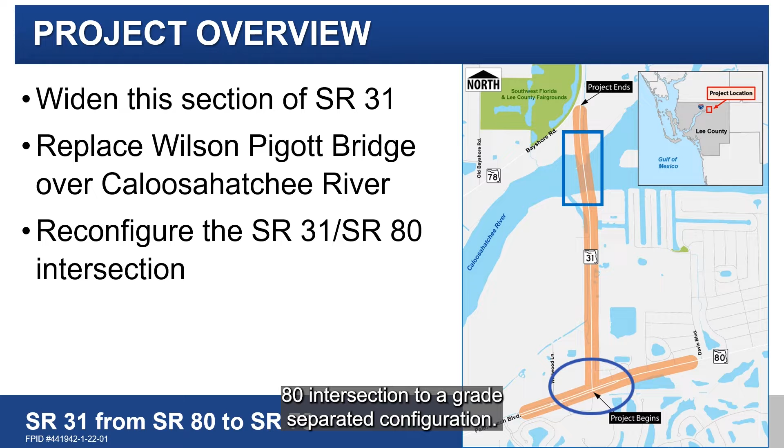The department proposes to widen this section of State Road 31, replace the Wilson Pigott Bridge over the Caloosahatchee River, and convert the existing State Road 31/State Road 80 intersection to a grade-separated configuration. The need for the proposed improvements to State Road 31 is based on existing and projected conditions, including the tremendous growth projected for Lee County.

Due to its proximity to Interstate 75 and other destinations, the area is transitioning from agricultural and rural uses to suburban, including Babcock Ranch. Current average traffic volumes are predicted to increase to volumes that would exceed the typical maximum volumes for a two-lane roadway by the year 2045. The area continues to experience substantial growth, further increasing traffic and straining the corridor's capacity, resulting in more congestion and poor level of service, including at the State Road 31/State Road 80 intersection.

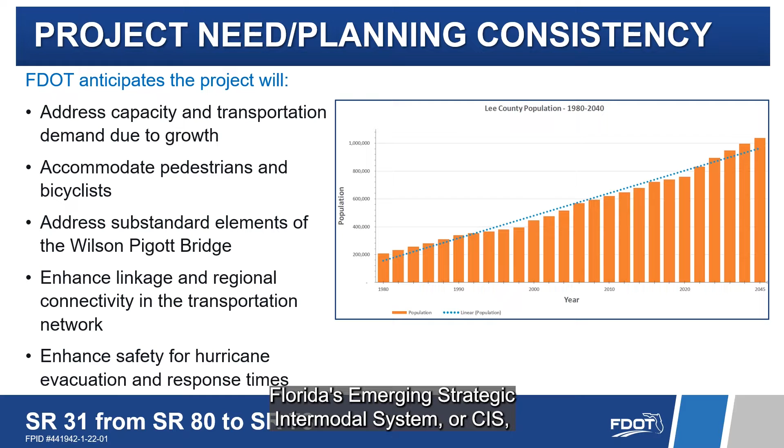In addition to traffic growth, State Road 31 currently does not provide accommodations for pedestrians and bicyclists. Also, improving the capacity of the roadway and maintaining the functionality of the bridge is important due to other special designations and functions. State Road 31 is a designated highway corridor of Florida's Emerging Strategic Intermodal System, or SIS, and a Tier 1 freight corridor of Lee County, with about 25% of existing traffic along the roadway composed of trucks. SIS facilities are those that are critical for regional and statewide movement of people and goods.

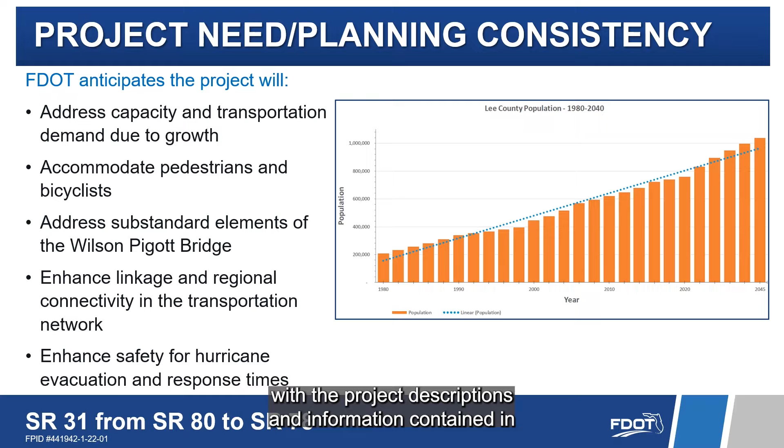The proposed project meets planning consistency. This means PD&E study documents are consistent with the project descriptions and information contained in state, regional, and local planning documents. Within the project limits, State Road 31 is a two-lane roadway with 12-foot lanes and 5-foot paved shoulders. Stormwater runoff is collected in roadside ditches with ultimate discharge to the Caloosahatchee River. The existing typical section does not meet SIS facility standards. The posted speed limit is 40 miles per hour.

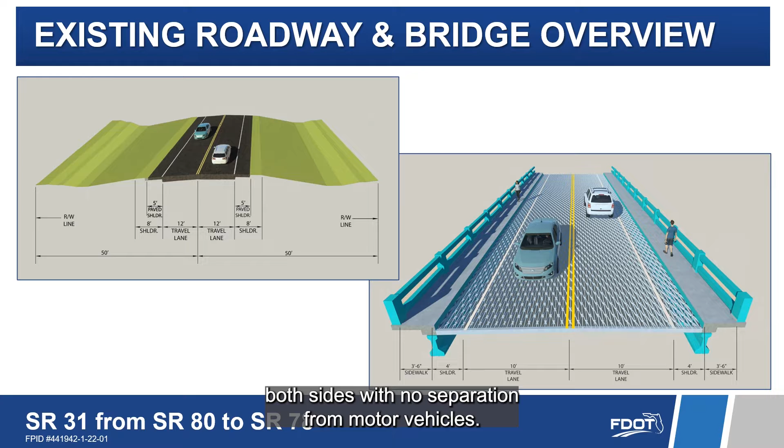The Wilson Pigott Bridge currently has two 10-foot lanes, 4-foot shoulders, and 3.5-foot sidewalks on both sides with no separation from motor vehicles. The existing vertical clearance over the channel is 21 feet.

Throughout this PD&E study process, FDOT evaluated many different concepts to improve capacity and operational conditions within the project study area, including at the State Road 31/State Road 80 intersection, and to identify a viable bridge replacement option. After environmental and engineering analyses and public and agency comments, many of these alternatives were eliminated.

The last public meeting was an alternatives public meeting held on January 30th, 2023. At that meeting, we asked for your input on proposed improvements to State Road 31. Some of the feedback received included concern regarding potential impacts to businesses, noise, and questions about construction duration. Based on your comments and additional environmental and engineering analyses, a preferred alternative was selected for the State Road 31 project. The supporting technical documents available for your review provide more detailed information regarding the engineering and environmental evaluations.

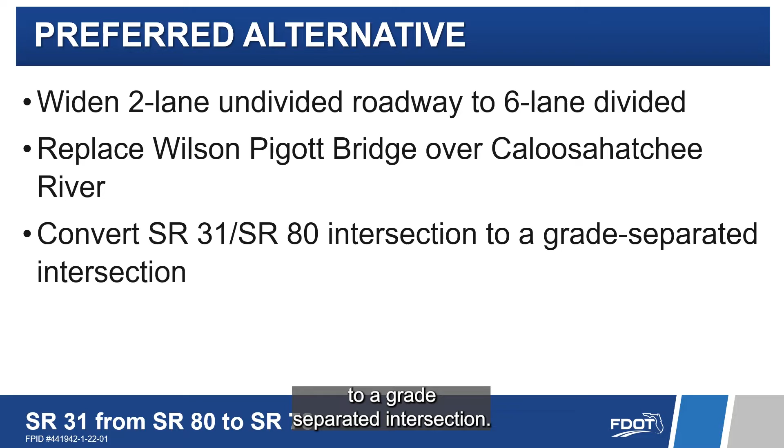The preferred alternative for State Road 31 results in the following: widening the existing two-lane undivided roadway to a 6-lane divided roadway from State Road 80 to State Road 78, replacing the Wilson Pigott Bridge over the Caloosahatchee River, and reconfiguring the existing State Road 31/State Road 80 intersection to a grade-separated intersection. Please note that all materials for the preferred alternative in the following slides are on display here tonight and are available for viewing on the project website.

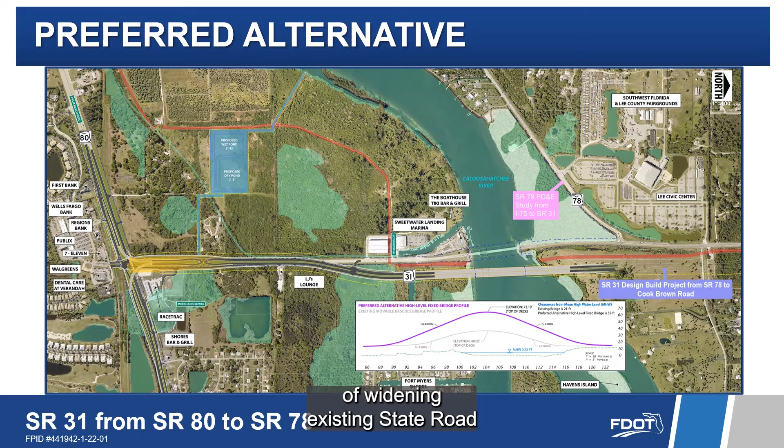The preferred alternative is a combination of widening existing State Road 31 from State Road 80 for about 0.7 miles, then shifting 300 feet east prior to the Wilson Pigott Bridge to minimize impacts to the existing Florida gas transmission line.

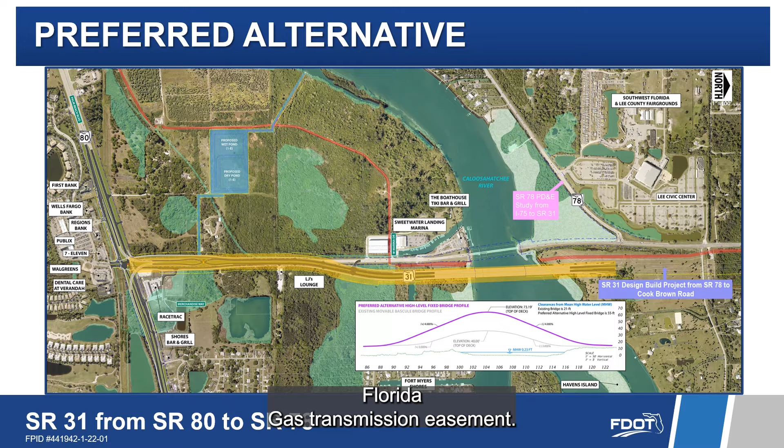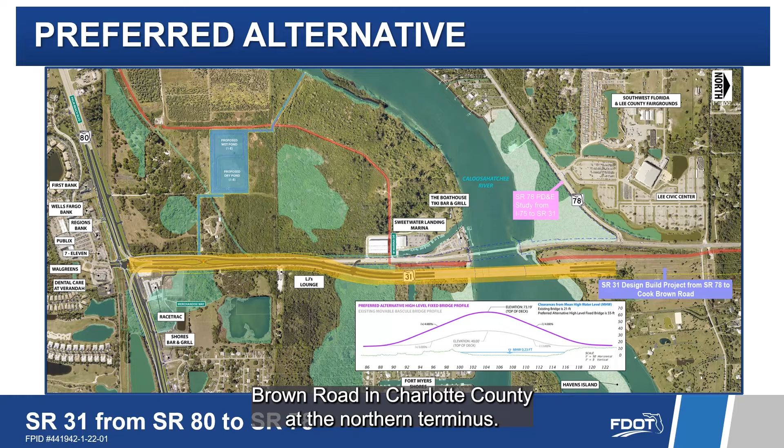This portion of the alignment will be located east of the existing two-lane roadway and the 50-foot Florida gas transmission easement. This project will tie into the current State Road 31 project from State Road 78 in Lee County to north of Cook Brown Road in Charlotte County at the northern terminus. The proposed speed limit is 45 miles per hour.

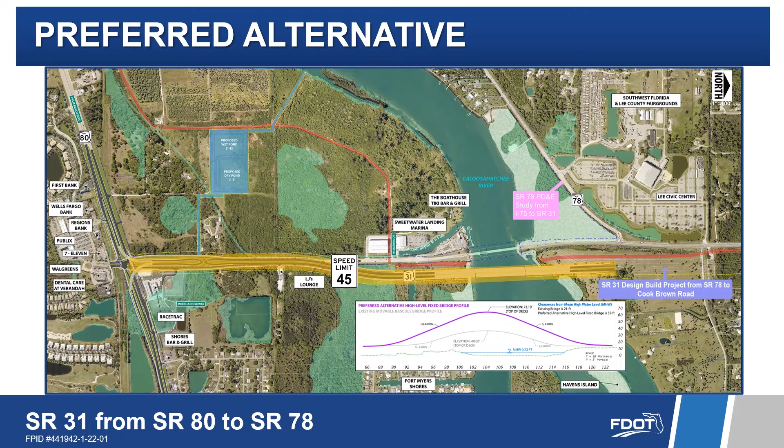The preferred alternative raises the roadway profile approximately 3 feet above existing State Road 31 due to the updated 100-year floodplain elevation in the project corridor. There are multiple typical sections, or how the roadway will look, associated with the proposed improvements. The typical section for the widening of State Road 31 north and south of the Wilson Pigott Bridge in the orange shaded area is shown here.

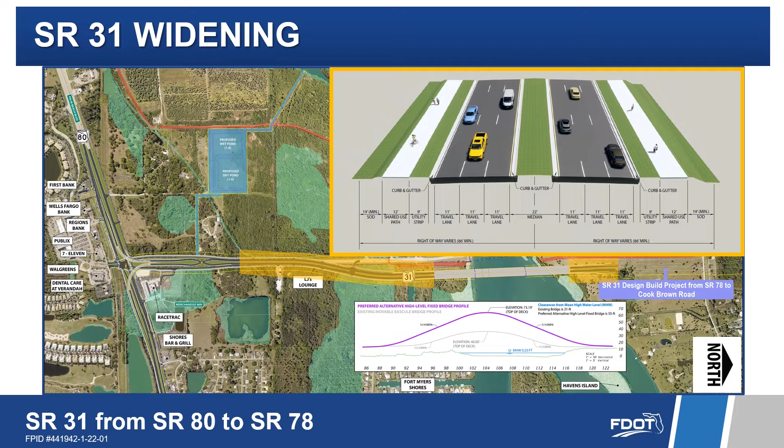The proposed improvement would consist of widening the two-lane roadway to 6 lanes and includes 3 11-foot lanes in each direction, separated by a 22-foot raised median with curb along the inside and outside lanes. A 12-foot wide shared-use path is proposed on each side of State Road 31 to accommodate pedestrians and bicyclists with an 8-foot utility strip between the back of curb and path.

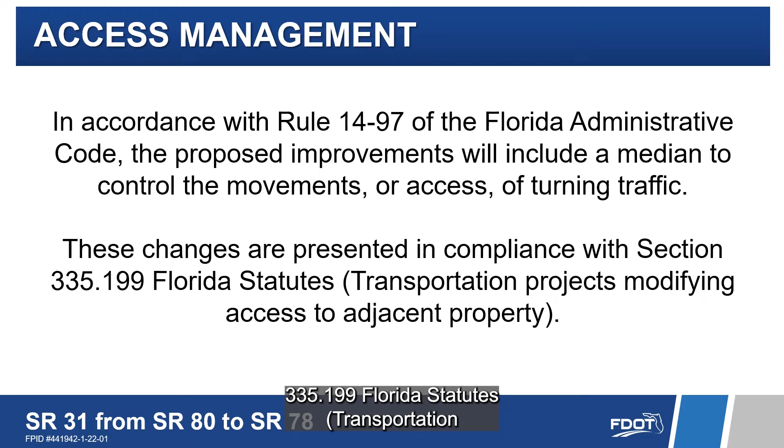In accordance with Rule 14-97 of the Florida Administrative Code, the proposed improvements will include a median to control the movements or access of turning traffic. These changes are presented in compliance with Section 335.199 Florida Statutes, transportation projects modifying access to adjacent property.

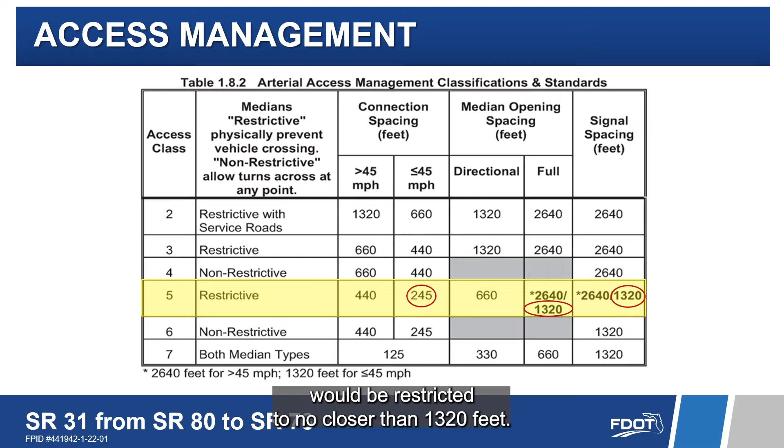The proposed project would include modifying the existing access management classification along State Road 31 to Access Class 5. Spacing between driveways and side roads would be restricted to no closer than 245 feet. Spacing for median openings and signals would be restricted to no closer than 1,320 feet.

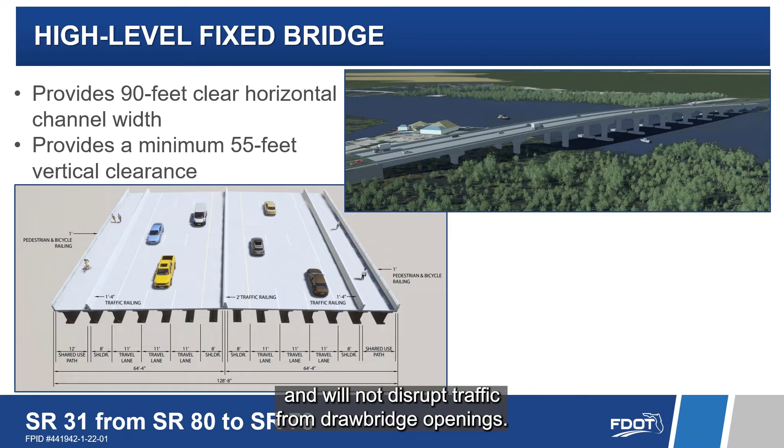This project will remove the existing drawbridge. The preferred alternative includes replacing the existing movable bridge with a high-level fixed bridge. The bridge will have 3 11-foot lanes in each direction, 8-foot shoulders, and 12-foot shared-use paths on each side. Pedestrians and bicyclists will be protected via a raised barrier and railing. This bridge will be 34 feet higher than the current bridge and will not disrupt traffic from drawbridge openings.

The preferred alternative also includes reconfiguring the existing State Road 31, State Road 80 intersection to a grade-separated intersection. The grade separation will introduce 2 new bridges for State Road 31 and State Road 80 movements, and will also include a new signal at a crossover location on State Road 31.

Southbound State Road 31 travelers, such as those coming from Lee Civic Center or Babcock Ranch, who want to go eastbound on State Road 80, will use the bridge and cross over at a new signal on State Road 31. Similarly, eastbound State Road 80 travelers, including those coming from Fort Myers who want to go northbound on State Road 31, will use the bridge and cross over at a new signal on State Road 31.

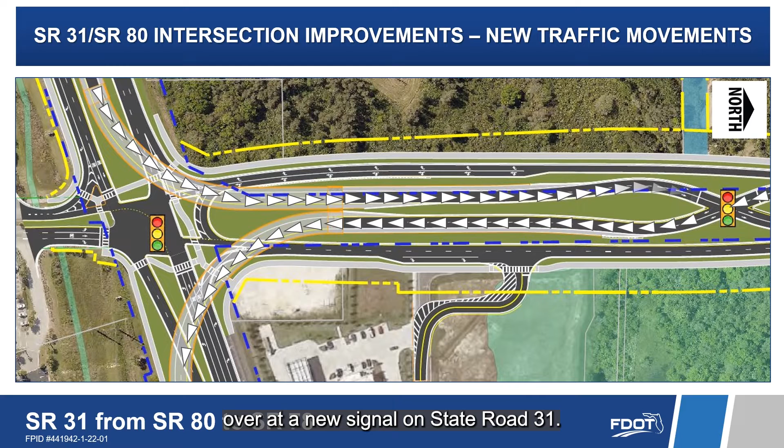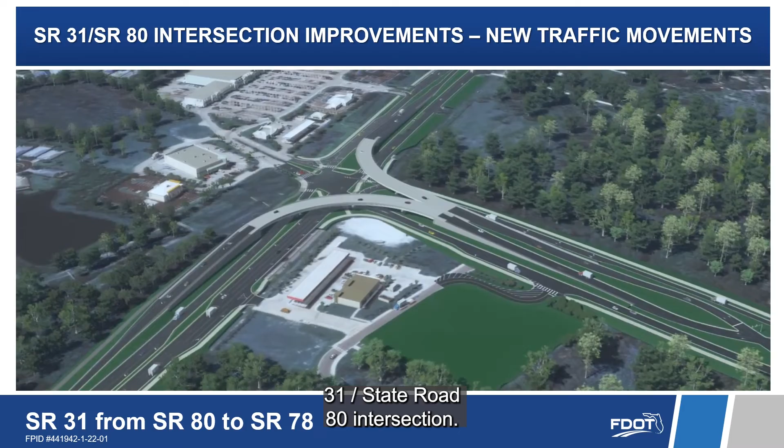This is an animated rendering of the new proposed configuration at the State Road 31, State Road 80 intersection. As seen in this animation, the elevated roadways and bridges will separate conflicting traffic movements between State Road 31 and State Road 80. This new configuration will improve traffic flow at this intersection by not requiring vehicles on State Road 80 to stop at the at-grade signal for heavy left turn movements. Please note that this is on display at tonight's hearing and is also available on the project website.

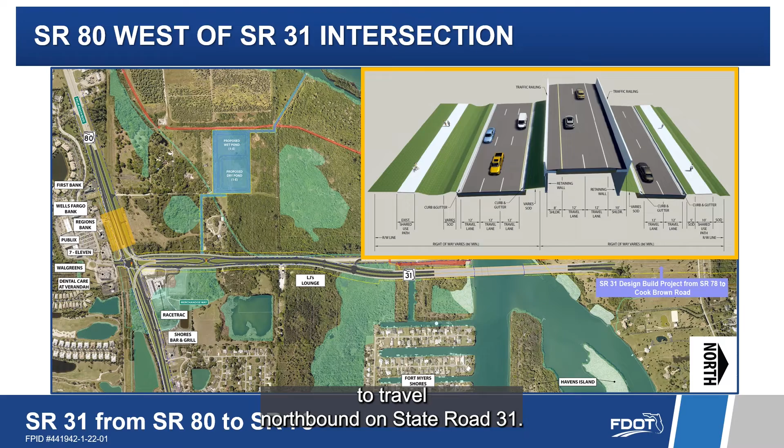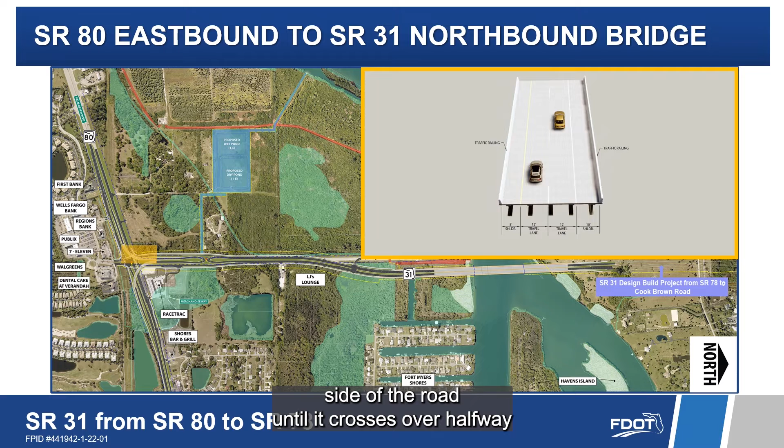The typical section shown here is how the bridge will look for the area shaded in orange for those traveling from eastbound State Road 80 onto the State Road 31 northbound bridge. Note, northbound traffic on State Road 31 will remain on the opposite side of the road until it crosses over halfway between LJ's Lounge and State Road 80.

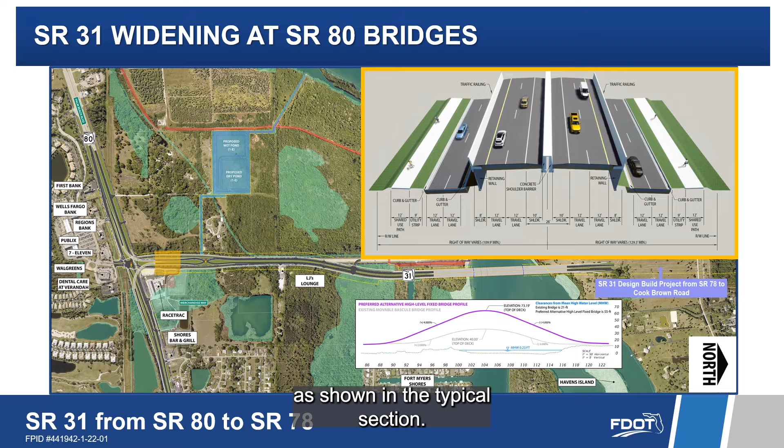The area immediately north of the proposed bridges, as shown in orange, will have an elevated center roadway section as shown in the typical section. Note, the traffic in the raised section remains on the opposite side until it crosses over halfway between LJ's Lounge and State Road 80.

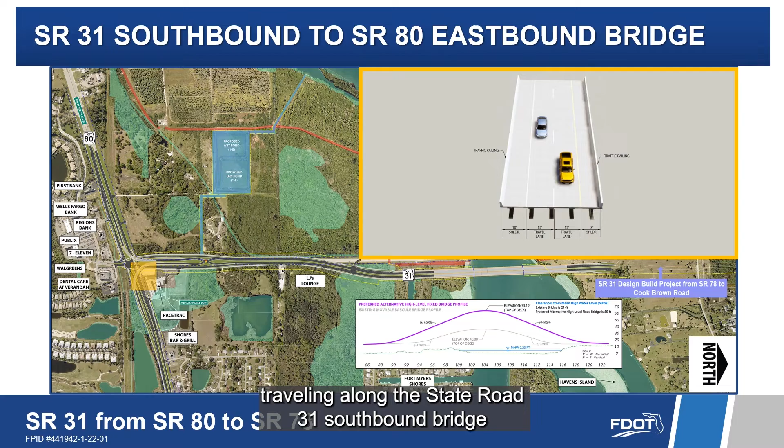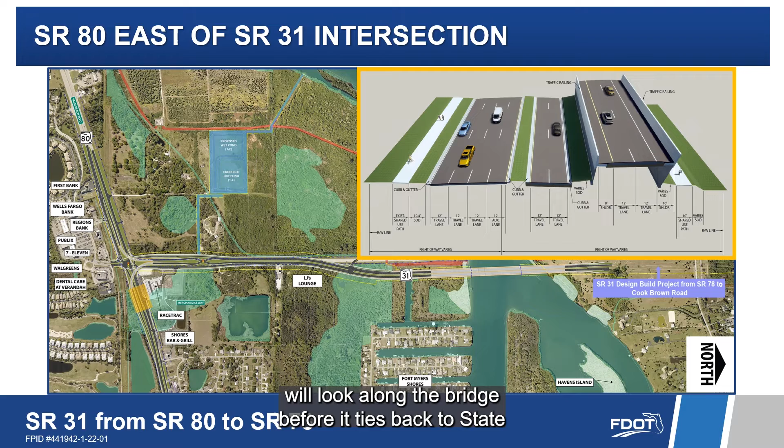The typical section shown here is how the bridge area shaded here in orange will look for those traveling along the State Road 31 southbound bridge onto eastbound State Road 80. The proposed typical section on State Road 80 just east of State Road 31, as shaded in orange, is shown here. This is how the roadway and ramp area will look along the bridge before it ties back to State Road 80 at grade.

Throughout this study, a no-build alternative is also considered. The no-build alternative assumes that no improvements are made to State Road 31 through the year 2045, except for routine maintenance. There are advantages and disadvantages to the no-build alternative. Advantages of the no-build alternative include no impacts to the natural environment and no new costs for design and construction.

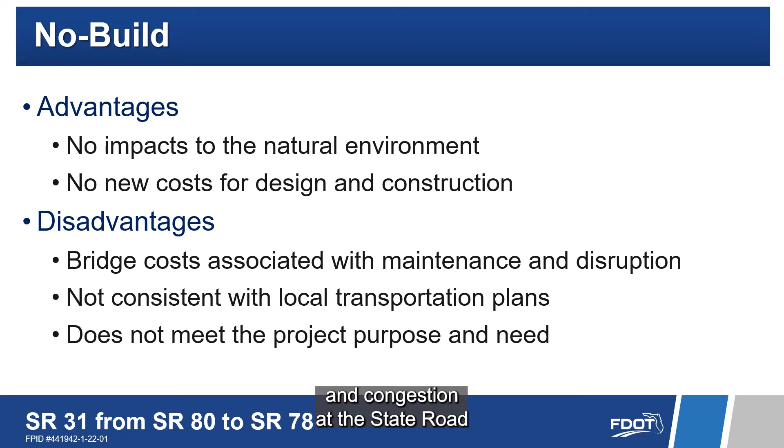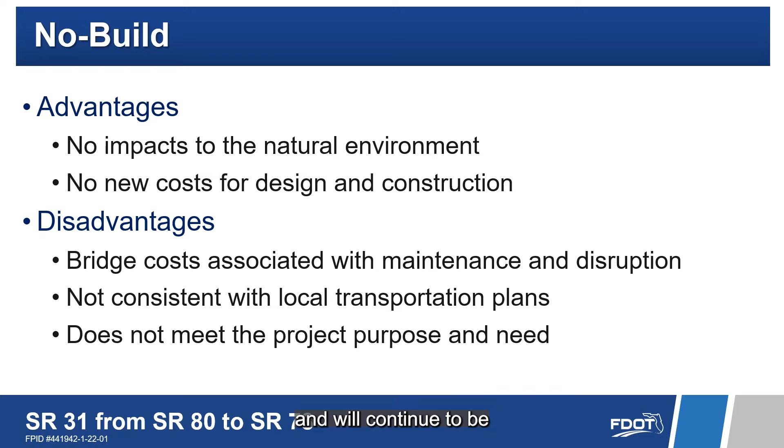Disadvantages of not implementing the proposed project are maintenance of the existing Wilson Pigott Bridge will become increasingly costly and disruptive. The no-build is not consistent with local transportation plans, and the no-build does not meet existing and future travel demand, address poor level of service and congestion at the State Road 31 and State Road 80 intersection, address bridge age, improve pedestrian safety along State Road 31, improve emergency evacuation, and enhance regional connectivity. The no-build alternative remains a valid option and will continue to be evaluated until the completion of this study.

FDOT evaluated environmental and socioeconomic factors relating to proposed State Road 31 improvements in accordance with the National Environmental Policy Act of 1969, as amended, and other federal requirements. The evaluation considered the effects of the proposed project on protected species and habitat, wetlands and floodplains, water quality, stormwater management and permitting, air quality, right-of-way requirements and relocations, contamination, archaeological and historic resources, recreational sites, noise, land use, and construction effects.

Protected species and habitats are allowed special protection under the Endangered Species Act of 1973 as amended and Florida statutes. FDOT assessed species within the project limits and through ongoing coordination with U.S. Fish and Wildlife Service has determined that the proposed project may affect but is not likely to adversely affect the existence of certain federally listed threatened or endangered species. The animal species include the smalltooth sawfish, eastern indigo snake, green sea turtle, Hawksbill sea turtle, leatherback sea turtle, loggerhead sea turtle, Audubon's crested caracara, wood stork, and West Indian manatee.

The project may affect the Florida bonneted bat, but this requires further coordination with federal agencies to confirm. In addition, no adverse effects are anticipated for the following state-listed threatened or endangered species: gopher tortoise, Florida sandhill crane, least tern, little blue heron, reddish egret, roseate spoonbill, tricolored heron, southeastern American kestrel. Coordination with U.S. Fish and Wildlife Service regarding the final status of these species is ongoing. If the preferred alternative is approved by the Office of Environmental Management, FDOT District 1 will continue to work closely with environmental agencies in future phases, such as design and construction, to meet all environmental permitting requirements.

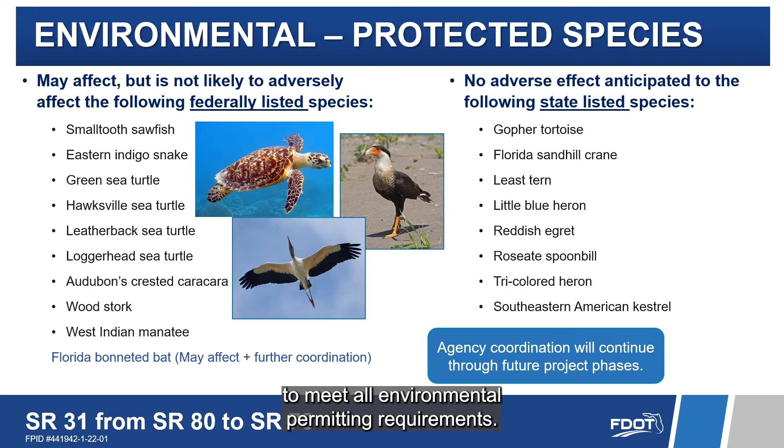FDOT evaluated wetlands within the project limits in accordance with Executive Order 11990, Protection of Wetlands. The proposed improvements may directly affect approximately 15.3 acres of wetlands, indirectly affect 5.2 acres of wetlands, and 7.3 acres of surface waters. The department will take all practical measures to minimize harm to this area. The department will mitigate wetland impacts resulting from this project's construction to meet requirements of Florida statutes and the United States Code.

The project has been evaluated for potential floodplain involvement in accordance with Executive Order 11988, Floodplain Management. There is no significant change in flood risk as a result of the proposed widening, and minimal impacts are expected to the 100-year floodplain. There is no significant change in flood risk, nor is there significant change in the potential for interruption or termination of emergency services or emergency evacuation routes due to flooding.

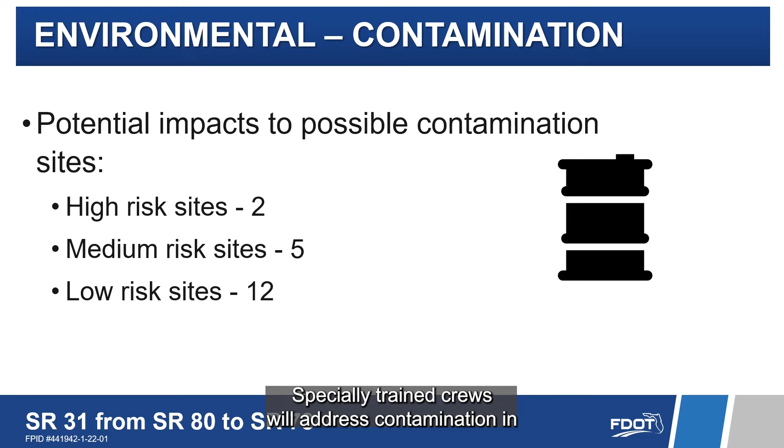Results of the environmental contamination screening showed that 2 sites were ranked high, 5 sites were ranked medium, and 12 sites were ranked low for potential contamination. For the sites that are ranked low for contamination, no further action is required at this time. For the sites with a risk ranking of high or medium, the FDOT project manager and the district contamination impact coordinator will coordinate on further actions during the design phase that must be taken to address contamination issues. Before construction, specially trained crews will address contamination in these areas as required.

The effects of traffic noise associated with the preferred build alternative have been evaluated in accordance with Title 23 Code of Federal Regulations, Part 772, and with the FDOT PD&E Manual.

Based on the results of the traffic noise analysis, there are no highway traffic noise impacted land uses within the project area that require abatement consideration.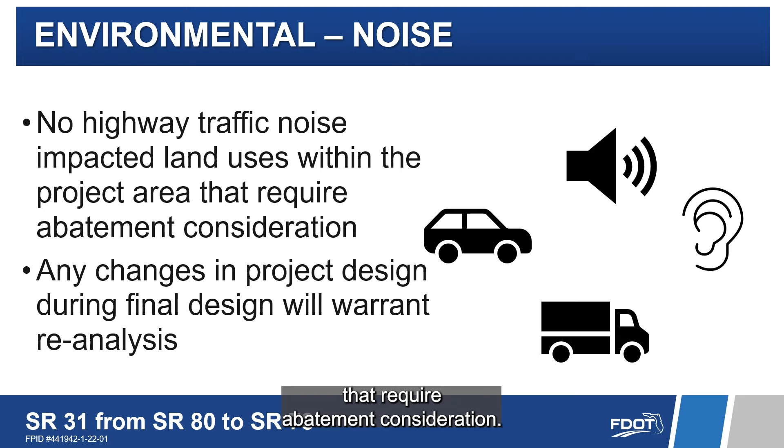A cultural resource assessment survey was conducted in accordance with the National Historic Preservation Act of 1966 and Florida statutes. Archaeologists and historians identified no archaeological sites and 6 potential historic resources in the project area. One resource, the Caloosahatchee River Canal, was determined eligible for listing in the National Register of Historic Places. The State Historic Preservation Officer determined that this project would have no adverse effect to this historic resource.

The project team examined the project area for publicly owned properties that may be affected under Section 4(f) of the Department of Transportation Act of 1966. There are 2 4(f) resources in the project vicinity, the Caloosahatchee Trail and the Great Calusa Blueway.

A portion of the Caloosahatchee Trail, a 10-foot multi-use path on the north side of State Road 80, may experience temporary impacts during construction. This existing trail occurs fully within the existing FDOT right-of-way, and the primary purpose established by FDOT for the trail is transportation. The proposed improvement of State Road 31 includes a 12-foot multi-use trail to support the trail system. There are no anticipated impacts to the Great Calusa Blueway.

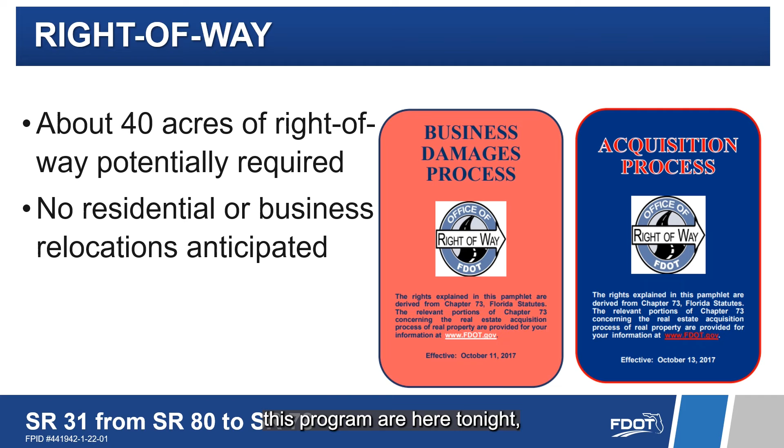It is anticipated that this project will not cause any relocation of families or businesses. All right-of-way acquisition will be conducted in accordance with Florida Statute 339.09 and the Federal Uniform Relocation Assistance and Real Property Acquisition Act of 1970, commonly known as the Uniform Act. The right-of-way specialists who are supervising this program are here tonight and will be happy to answer your questions.

An evaluation matrix showing a detailed comparison of the preferred alternative and the no-build alternative is provided in the project handout and is also on display here this evening. The matrix shows potential effects to the social, cultural, natural, and physical environments and identifies preliminary costs.

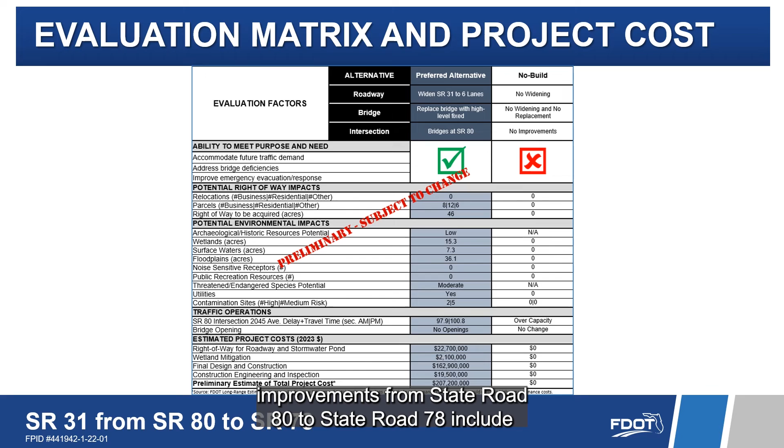The estimated costs to make the proposed improvements from State Road 80 to State Road 78 include $162.9 million for final design and construction, $2.1 million for wetland mitigation, and $22.7 million for right-of-way acquisition and stormwater management areas. The cost for construction engineering and inspection is estimated at $19.5 million. The department's preliminary estimate of total project cost is $207.2 million.

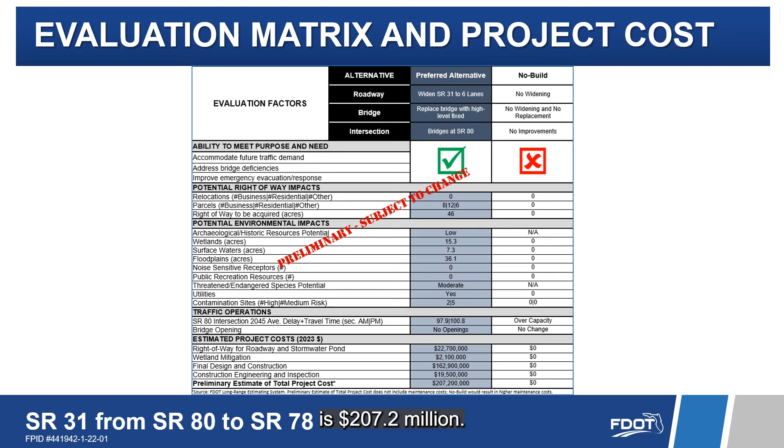The department anticipates completion of this PD&E study by spring 2024. The schedule is on display this evening. The right-of-way phase is funded. Construction is not funded at this time.

We encourage you to review project information tonight and provide us your feedback. All comments should be submitted or postmarked by November 12, 2023, to become a part of the formal hearing record. You can submit comments verbally or in writing tonight, via the project website, or by email or U.S. mail to the project manager.

All hearing materials presented tonight are available to the public on the project website and will remain posted for your review. The project technical documents are also available for review in person here tonight. Project documents will also be available for public viewing during normal business hours at the locations shown. Please visit the project website at www.swflroads.com/project/441-942-1 for the latest study information, schedule, and upcoming events.

This PD&E study is being conducted and completed according to the requirements of the National Environmental Policy Act and other related federal and state laws, rules, and regulations, which will qualify future phases of this project for federal funding. And this hearing was advertised consistent with those requirements. Please see the statute display board for all other applicable requirements.